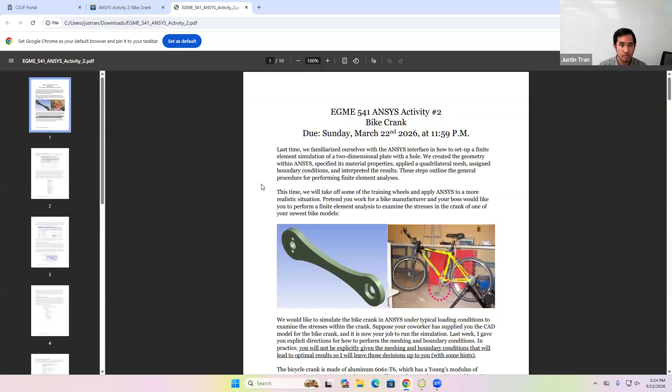And maybe you can print out on Saturday. Yeah, I probably have to pay for it first and then keep the receipt, and later on I'll reimburse you for it. No, we have to do that.

So yeah, we could leave around the afternoon of Saturday. I'll message you about the location and time.

Just ping me when you're ready for the poster and send it to me for one last review. Okay, yeah, I might need to change the words a little bit. Yeah, all right.

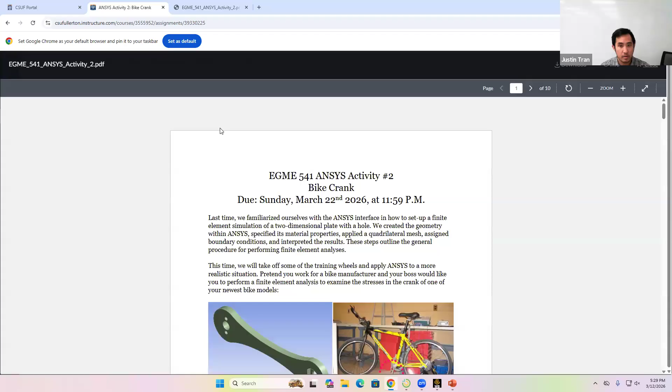All right, it's 5:30, so let's get started. Good evening, everyone. How's everyone doing today? Pretty good. Good, good. Everyone put Bengay on their hands after the midterm on Tuesday? Yeah, it was a long exam. I know, the first exam for this class is always pretty brutal.

So before we start today, since the midterm was very difficult, we're going to do kind of a break day. We're doing our second ANSYS activity today, the bike crank activity. This one's a little less time consuming, and actually a lot of people finish it pretty early, so hopefully it'll give you guys a bit of a break after the midterm.

But before we get started on the activity, I wanted to make a couple announcements regarding the midterm. So I haven't looked at them yet. I actually gave 3 midterm exams this week, so I need to grade my undergrads first.

So I think for you guys, I'll have the exams ready by next Thursday, March 19th. If you want to pick up your exam, I'll bring them to the lecture by next Thursday, and you can pick them up then. I expect the grades will be on Canvas by Wednesday night, the 18th. That's when I expect to be done.

Remember that there are 2 midterm exams in this class, and remember they have different weightings. One midterm is worth 35% of your grade, and the other is worth only 25% of your grade. And remember, the way I choose which midterm counts for higher or lower depends on which midterm you ultimately score higher on.

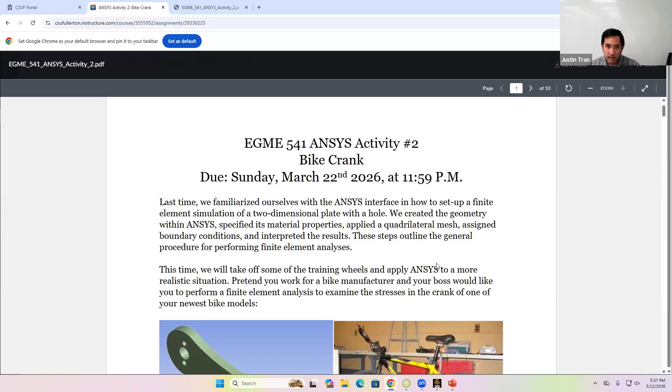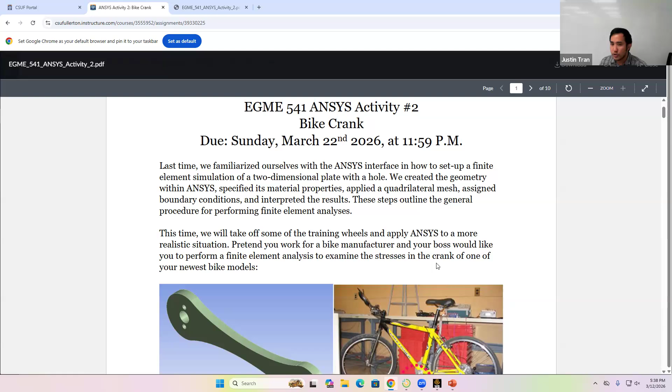And you're not really simulating a plate with a hole for no reason at all, right? So our second activity here, first of all, the geometry is a bit more realistic. And the application of how we use FEA is going to be a bit more realistic in terms of answering a specific question, because most of the time when you run FEA, you're never running it just for the sake of it.

So you're never just running it to create pretty pictures and diagrams, even though the diagrams do look nice. Usually you're answering some kind of engineering question, doing the analysis for some kind of purpose. And today we're doing an analysis of a bike crank, which is basically the part that connects the pedal to the rest of the bike frame. What we want to do is simulate this bike crank under a typical loading scenario, and determine whether the bike crank, as it's currently designed, is able to withstand these typical forces, and maybe find a way to redesign it a little bit better based on the results of our simulation.

For this case, I'm going to leave a lot of the finite element decisions up to you. Things like determining the mesh, determining the boundary conditions - I'll give you some hints, but for the most part I'll let you guys determine that yourselves. Also, for the first time, we are going to be making a custom material. We're going to make the bike crank out of aluminum 6061, which is a very common alloy of aluminum. And then we'll go from there.

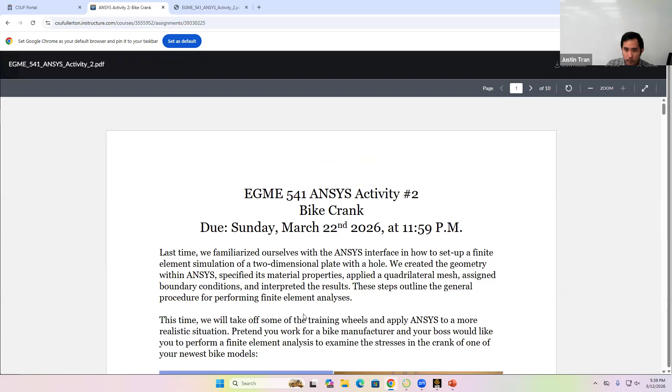So if you haven't done so already, let's go ahead and launch ANSYS. Remember, the way to launch it is, assuming it's installed on your computer, we need to launch the program called Workbench. So go ahead and search up ANSYS Workbench or just Workbench on your computer and hit enter. I'm going to talk for the next 5 minutes, but while I'm talking, you can launch it in the background since it takes a while to launch ANSYS sometimes.

Oh, and if you haven't done so already, the geometry for this activity is on the Canvas site. So if you go to our Canvas page, go to the activity page, go ahead and download the crank file for this activity as well.

One of the big differences you're going to see in this activity compared to the last one is that we're not going to draw our geometry from scratch. I'm actually going to give you the CAD file and you're going to load that within ANSYS itself. This is a bit more typical in terms of how ANSYS is usually used - a lot of times we're not creating CAD files from scratch within ANSYS. Usually you're creating the CAD file in another software like SolidWorks or AutoCAD, and then importing it into ANSYS to do the analysis. So this emulates that exactly - you're going to download the CAD file and then import it within ANSYS.

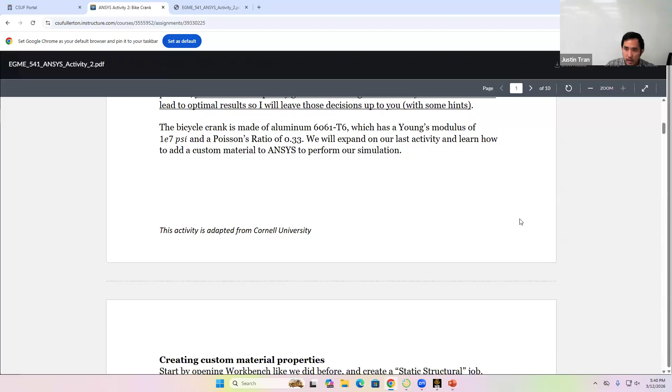All right, so that's kind of the goal for today. Compared to the last activity, I'm not going to be up here talking all too much, since the process is more or less going to be the same. We're basically going to be doing our geometry, doing our meshing, doing our boundary conditions, and doing the analysis from there. And one big thing you're going to see here is that I'm going to have you do a lot more with the results - I'm going to ask you things like analyze your results, predict things like the maximum force that it can withstand, and things like that.

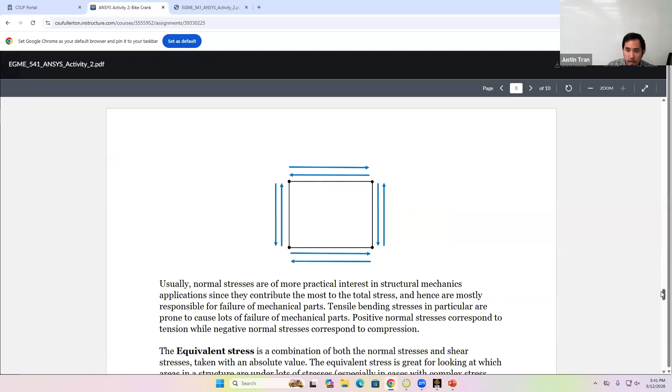So was everyone able to open up ANSYS and open up Workbench? Okay, let's go ahead and bring over Workbench here.

Oh, midterm one related question.

Considering no one really finished, would this first exam have a lower average that gets bumped at the end through grade scaling? Yes. That's the whole purpose of grade scaling: for a case like this, where the exam was pretty tough and the average was lower, that's probably going to lead to a higher amount of grade scaling at the end.

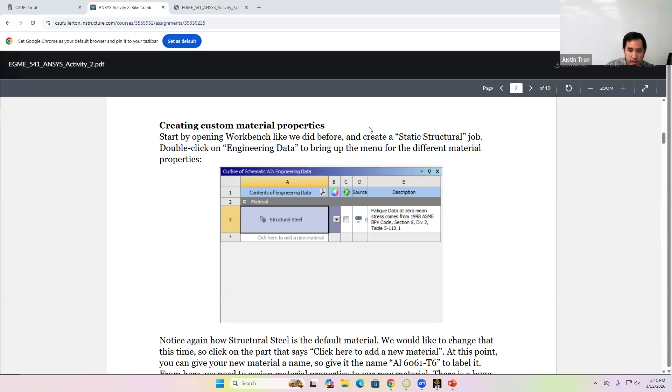But this does give you time to make it up on the second midterm, and on the final project as well. Overall, though, I think this will lead to more grade scaling at the end. I don't know how many points I'll add right now, since it's still pretty early in the semester. Generally in this class, the first midterm exam is the low point, and after this people tend to do much better on the second exam and on the final project. Last time I taught this class, I think I only applied maybe one or two points of grade scaling at the end, even though the midterm one average was probably around 65%. So there's a lot of time to make it up.

If someone has a crazy grade, would they get taken out of the scaling calculation? No — if they exceed 100%, they just get an A, since there's nothing past an A. But if you're asking whether I take them out of the average, no, I just take the average of everyone in the class.

The class is big enough that usually one outlier isn't going to ruin the calculations all too much. But I'll look at the data, and if there are a few outliers, I'll take that into account and think about it.

Okay, let's go ahead and open up ANSYS here. Let's open up Workbench, and just like last time, let's create a static structural analysis. So let's click and drag static structural and put it over here.

It's a little unfortunate that in this class we don't do too much ANSYS, since there are so many other analysis types to cover. There's obviously a lot more we can do with ANSYS, but for our purposes we're just going to do static structural.

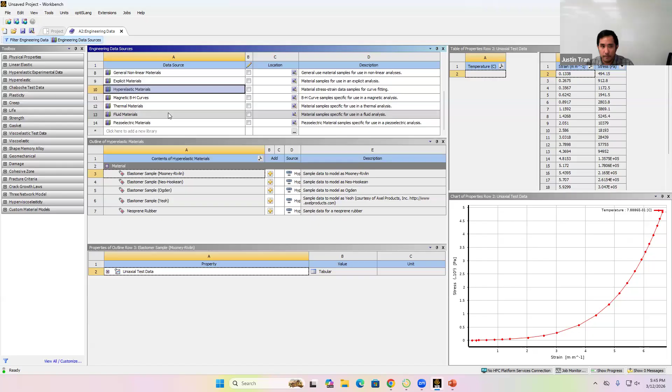You can see why a lot of these materials aren't loaded by default, since there's a lot to go through. Usually, if you're doing a basic static structural analysis, a lot of times you'll be adding materials from this library called general materials.

If you look here, there are different materials - here's our structural steel, there's even stainless steel, titanium, polyethylene, magnesium, cast iron. If you look at aluminum, if you left click on a material here, you can actually look and see its properties down at the bottom.

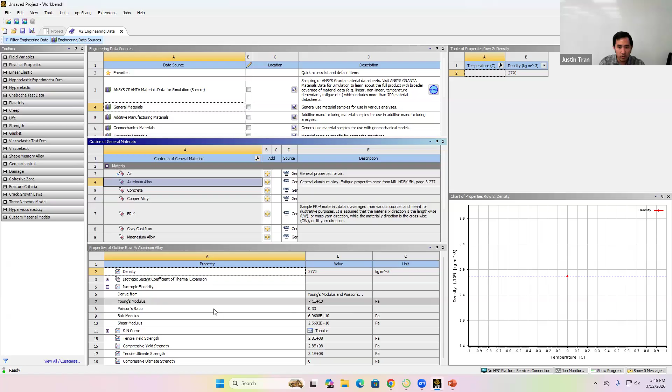Now let's check and make sure this aluminum alloy has material properties that match what we want for our analysis. We want our material to have a Young's modulus of 1 times 10 to the 7th and a Poisson's ratio of 0.33. If we come back to Workbench, we can see the Young's modulus of this aluminum alloy is 7.1 times 10 to the 10th Pascal.

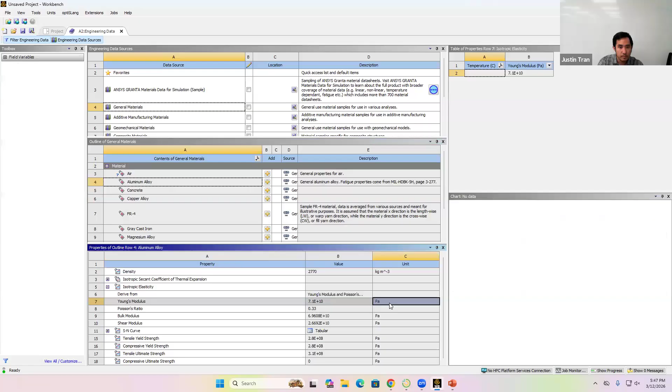So let's go ahead and change the units here somehow. Let's change the units to US customary, which gives us PSI. The units are up at the top here. That did not change it, let's see. I think they changed the interface here.

It used to be that you could kind of update the units and see them change. Oh, let's see, here we go. So if you want to change the view of the units, you have to change the units up here to whatever you want, and then click on this checkmark called Display Values in Project Units. I think that was an update they made on the most recent version.

If we look at our Young's modulus for our aluminum alloy, you can see it's very close. We're looking for a Young's modulus of 1 times 10 to the 7th PSI - that's how much we want for our project. ANSYS gives us a Young's modulus of about 1.03 times 10 to the 7th PSI, so it's about 3% off. This is pretty close, and it depends on how close you want to be.

But if that's close enough for you, you can just click on this plus arrow here to add that to your project. So to add a material to your project, you just click on the plus arrow and it adds it there.

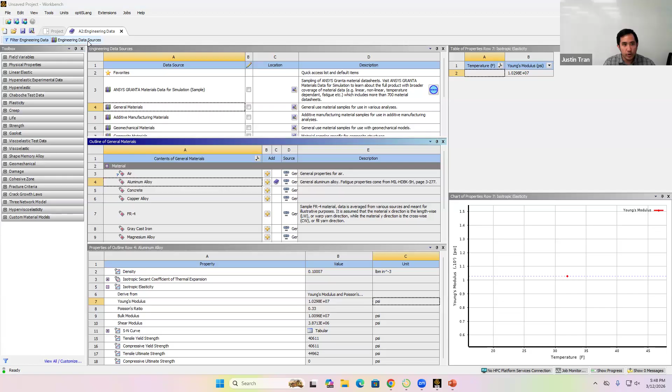To check and see if the material was added to your project, you can exit out of this library by left clicking on the book here, Engineering Data Sources, and come back to your library. Now we have 2 materials, one being aluminum alloy and the other being structural steel.

That's one way to add a material. If your material is already built in within ANSYS, that's generally the most convenient thing. But there's another way we can manually add materials that I want to show you. For now, was everyone able to add aluminum alloy to their project using that method?

Good. So the other way we can add a material is we click on this box here to add a new material, and we're basically going to add our material custom. Let's go ahead and click there and define our new material. Let me call this something unique - we'll call this AL6061. Now we're free to add in our material properties as we want.

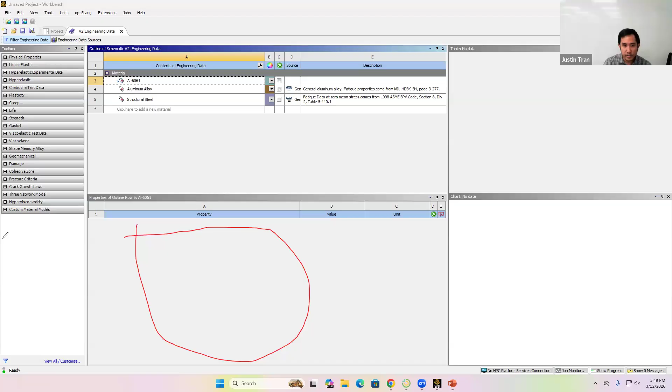Okay, so to add specific material properties, you can see right now it's completely blank. We need to define which material properties we want to add in, and there's lots of different material properties that we can do.

We can add in hyperelastic material properties, things like density, geomechanical properties, or viscoelastic properties. But for a general material here, where we're just doing a static analysis, the only materials that we need are linear elastic materials.

So in particular, we want to add isotropic elasticity of this material. So with your new aluminum highlighted here, go ahead and double click on isotropic elasticity. That way we can now define the Young's modulus and Poisson's ratio of our material.

For the Young's modulus, let's go ahead and enter the amount that we want, which is 1 times 10 to the 7th. You can just enter 1e7. And then our Poisson's ratio here is going to be 0.33. And so with that, our material here is fully defined.

So we've only defined the isotropic elasticity. But if you want to add things like density and viscoelastic properties, you can do that as well. But that's kind of the basics of making a material from scratch.

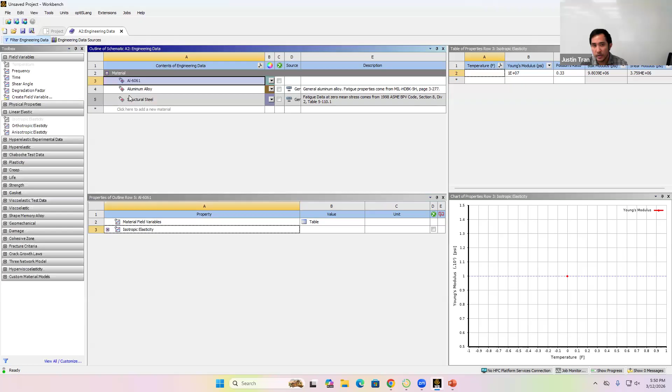So for this particular activity, you can use either one. You can use the pre-built aluminum, or you can use the one that you just defined here. But since this is our last ANSYS activity, I did want to show you both methods of adding a new material. Any questions on this?

Okay, good. All right, so let's go ahead and come back to the project. Let's close out of the engineering data. All right, so next thing we're going to do is add the geometry to the project. Remember, in this project, we're not going to draw the geometry, we're just going to simply import it from the file that we just downloaded.

So to import a geometry, you're just going to right-click on geometry here, and then go to this option for import geometry. Import geometry is going to allow you to basically browse, so let's go ahead and click on browse. Then we're going to add in the crank file that you just downloaded. Remember, the crank assembly is the file that's available for download from the Canvas site. So let's go ahead and add that in.

So if you're on the lab computers here, it's going to display as a SolidWorks object. But it's actually not a SolidWorks part, right? If you go to the file itself, I'm just going to show you really quick. I think it defaults to SolidWorks just because we teach SolidWorks in this class. But if you look at the properties, you can see that the file extension for this is actually x_t. So again, this computer thinks it's SolidWorks, but it's not.

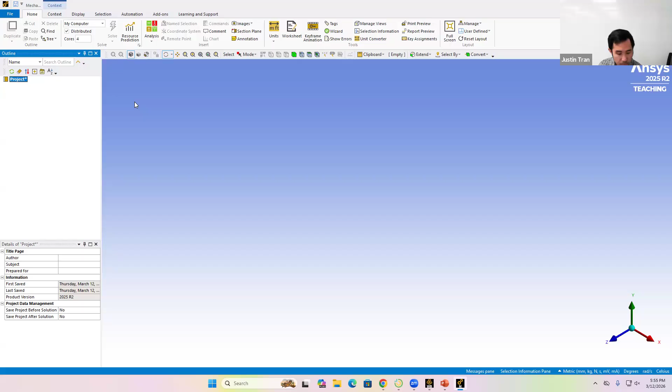Alright, so if all goes well and your import is good, after you open up ANSYS Mechanical, you should be able to see your part within the graphical user interface.

Everyone able to kind of get this part here? Everyone able to open up and see the bike crank? It probably takes a minute or two to open up ANSYS. It's not known for speed, that's for sure. Okay, everyone able to open up? Good, okay, alright.

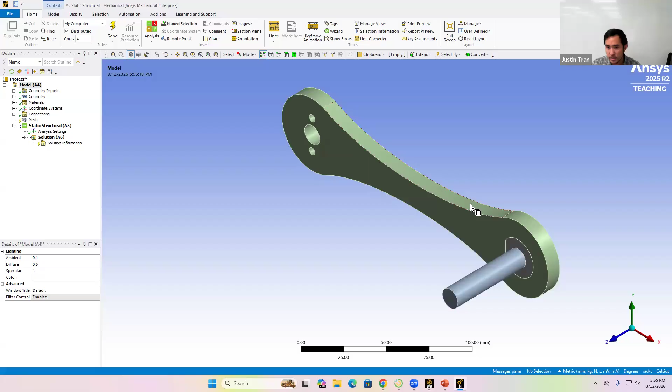So here is our bike crank, and what you can actually see here is actually an assembly of 3 different parts. We have the main body of the bike crank. We have the pedal, which is just the cylinder kind of jutting out here. And then we have an adapter ring that fits inside there so the pedal can mate with the bike crank.

For an assembly of parts like this, you can actually suppress different parts if you're not going to need them in the analysis. This is very common. Oftentimes in finite elements, you'll be given an assembly of parts that's way more complex than what you need, because a lot of times when engineers or designers make these CAD files, they're not making them to do analysis on - they're doing the CAD files to get every detail in terms of the manufacturing and things like that.

But one thing with finite elements and with any computational analysis in general is that usually when you add more details to your simulation, it actually makes it more difficult to run. A lot of times you add that difficulty kind of unnecessarily, and you just make things difficult for no reason. So a lot of times when you get these assemblies, you want to suppress some parts and remove them from the analysis just to give yourself an easier time.

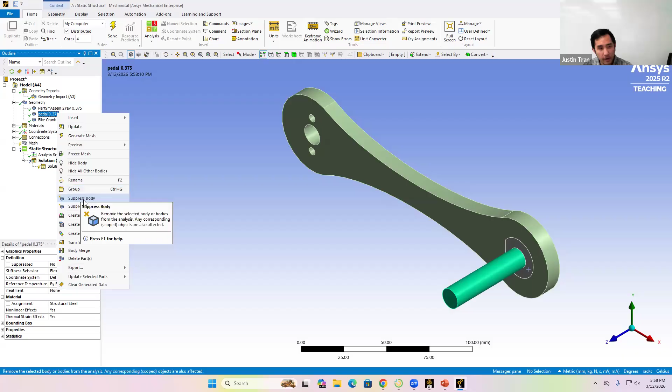First we'll suppress the pedal. Let's right click on pedal - you can find it by clicking this plus arrow next to geometry. To suppress a part, right click on the part, and then go down to this option called suppress body. Click that, and you can see that part of the geometry is no longer there. Now you can unsuppress it - it's not like you deleted it, you're just hiding it. To unsuppress it, you just right click it and then unsuppress, and then it's right back.

Let's do the same thing for this little adapter ring here, called part 9 assembly 2 rev X 0.375. So let's go ahead and suppress that one as well, so then all we're left with here is just the bike crank.

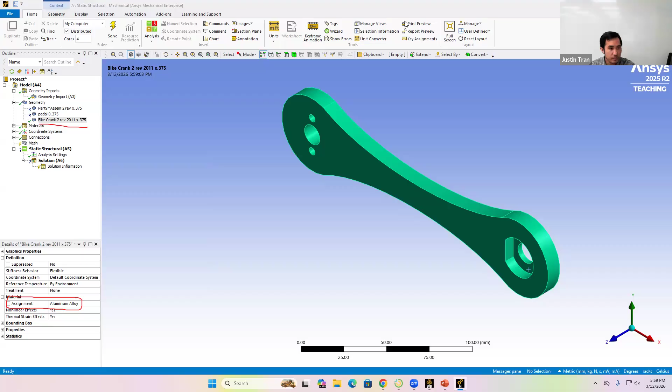Okay, good. All right, so now our geometry is ready, we have our material properties set, so now we can go ahead and move on to the mesh. So the mesh is actually fairly straightforward, so I think I'll do it together with you, and then I'll have you do the boundary conditions yourself.

So for the mesh here, we have a pretty straightforward part, and all we're going to do is assign a size. Remember, just like we did in the last activity, you're going to left click on mesh, and then in the bottom left-hand side of the screen, you're going to go to element size.

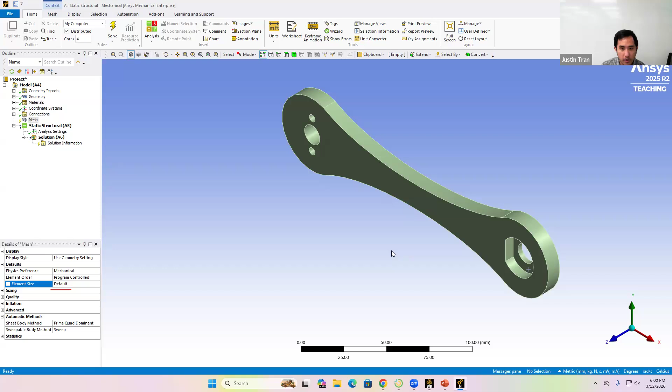Okay, so right now it's using the default size, but let's go ahead and specify something. Let's specify an element size - let's see how big this part is. I'm going to use this ruler down here to kind of estimate the size. There's a question in the chat.

Question: the materials don't seem to be loading when I click assignment. Do you not have any materials there at all, or do you just have structural steel? Oh, okay. Let me come back to you - let me get to a good stopping point, and I'll come back to help you.

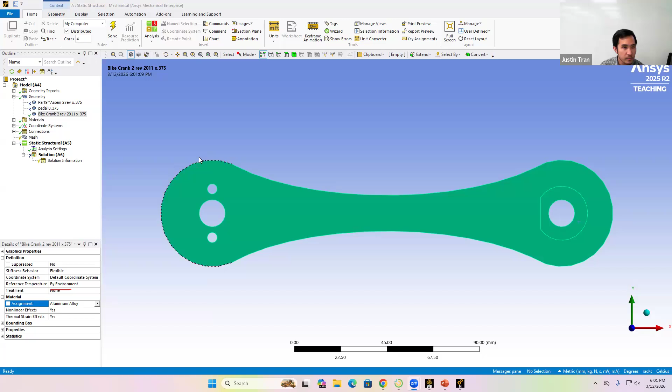All right, so for the mesh here, let's go ahead and set the size. We have basically a bike crank that's about maybe 200 millimeters long, so let's go ahead and set an element size of, let's try 25 millimeters to begin. Let's see how that looks. When you have your mesh, go ahead and right-click generate mesh. So with the mesh size of 25 millimeters, we get a mesh that looks like this.

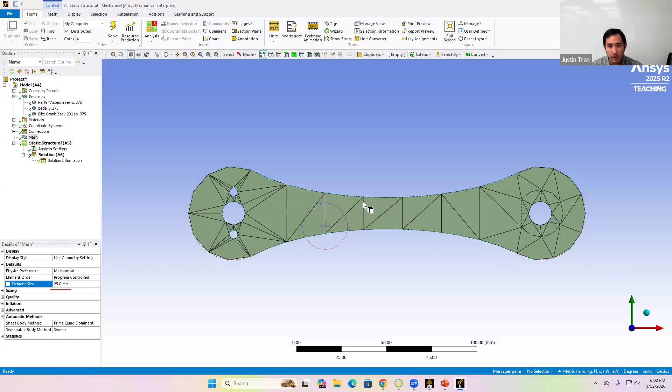This is pretty awful, not gonna lie - this is a pretty awful mesh just because it's very coarse. So let's go ahead and refine this mesh. Remember, our mesh here determines our accuracy, so the finer our mesh, the more accurate our results are going to be. So let's set our element size here to 5. Let's see what that looks like.

Okay, so with 5 millimeters, we're doing a little bit better here, right? But it's not really where I want it to be.

Let me give you one rule of thumb for meshing. Meshing is actually a very complex topic - you could spend weeks talking about meshing. There's a lot of opinions in terms of what's a good mesh, what's a bad mesh, and everyone has a hot take on that. But one good rule of thumb, especially if you have a relatively slender part like this, is you want to see how many elements are through the thickness of your geometry. One metric I always check for these types of simulations is I look at the thinnest dimension of your mesh. What you should see is that you should have more than one element through the thickness of the mesh - that means you should have more than one layer.

You should not have an element that stretches from one end to the other. Which is obviously what we have here. You can see this one triangle element that stretches from one edge to the rest. You don't want that, because then you have no interior nodes along this edge, which can lead to a lot of inaccuracies.

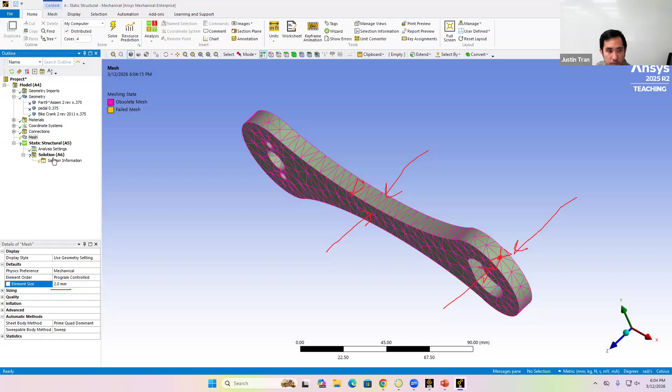Okay, with 2 millimeters here you can see we're doing much better. We have more elements through the thickness here, and this is going to give us a much higher quality result.

You can go even further down. Even with 2 millimeters we're kind of pushing it a little bit, but let's go down one more, to 1 millimeter, and see what that looks like.

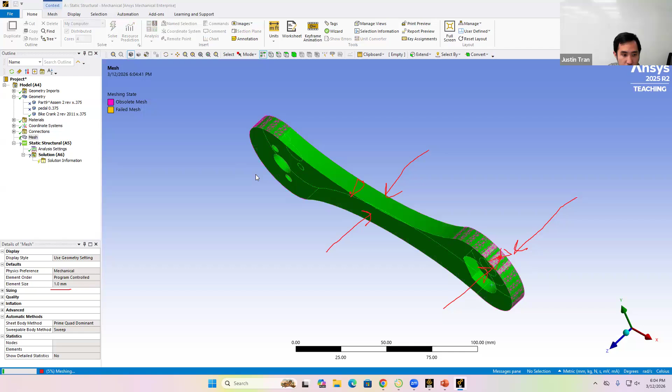With 1 millimeter, this is a little bit overkill. If you look at the statistics for this mesh, we're at 39,000 elements. For a tiny little bike crank like this, that's overkill, you don't need that many.

So let's just go back up to 2. I think 2 gives us a good balance here. It's pretty decent, and it gives us a decent mesh that's not too expensive, the number of elements is not too large, but it does at least give us 2 elements through the thickness, which is good.

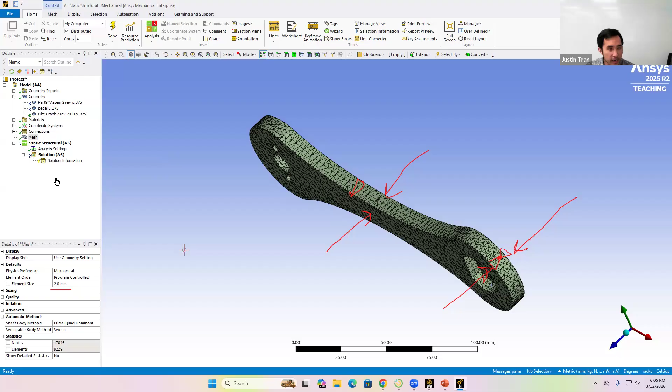All right, any questions on the mesh here?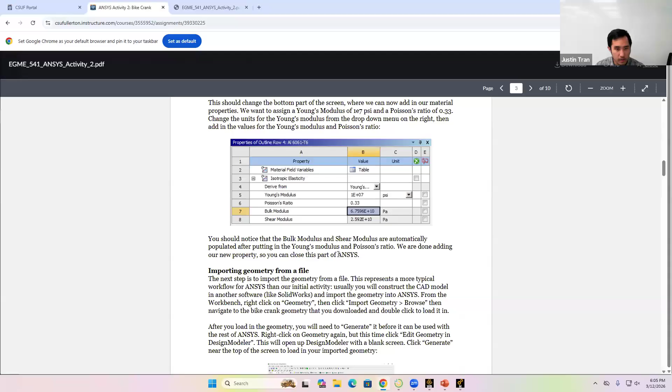Okay, so the next part, I'm going to have you guys work on your own while I go around and help debug people that are having issues. If you go to the project, to the activity document, we've done problem 1, the mesh. So that's done.

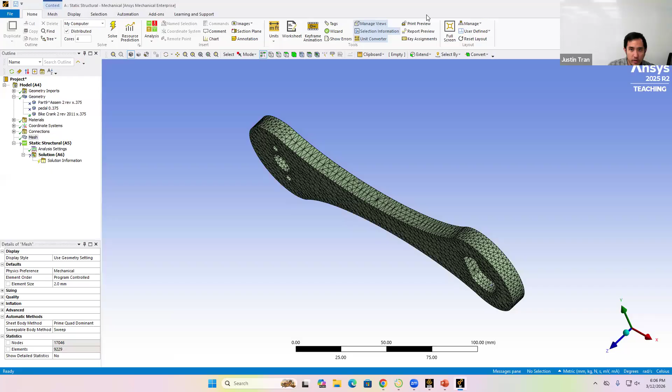Problem 2 is loads and constraints. You're going to be adding loads and constraints, forces and fixed supports as needed. I'll let you do this yourself, but the only requirement is that you must have at least 1 fixed support.

And you must have 1 location where a 100-pound force is added to the bike crank. You must add those 2 boundary conditions to your model. Where you apply them I'll leave up to you, but remember, you're modeling a realistic situation here.

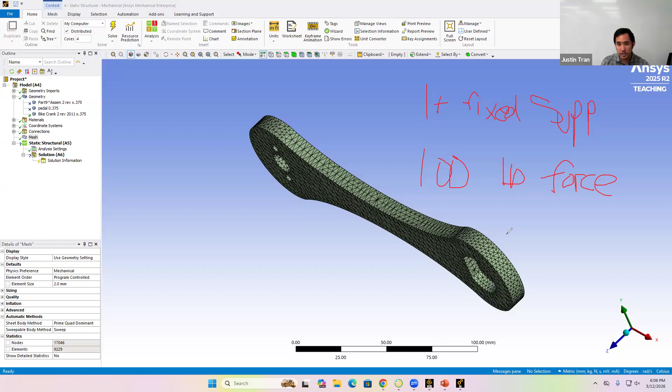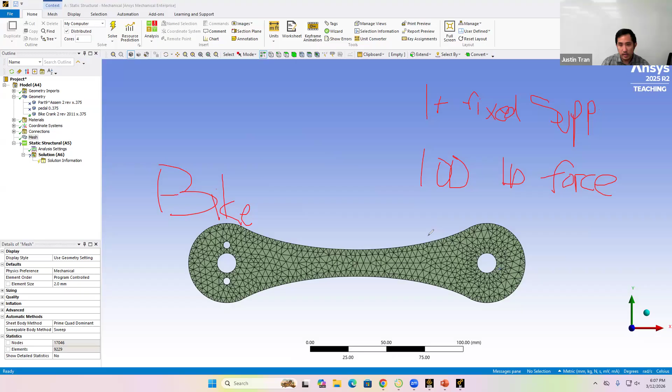Let me give you some additional context to help you choose where to put these. Here's our bike crank. You can expect that this side with the 3 holes is where the bike crank attaches to the bike, so the bike frame is on this side. The other side of the bike crank, remember, is where the pedal was. We suppressed the pedal, but that's where it was.

So this 100 pounds of force is meant to emulate the force of someone pushing down on the bike pedal. I'll leave that up to you, so not only do you have to determine the location of the force, but also which direction the force is going to go. You can do it in the Y direction, the X direction, or even the Z direction. Think about what makes the most sense in terms of the direction of the force.

Because remember, we want to simulate the worst possible case. So think about which direction of the force you want to apply, that's going to result in the biggest deformation and the biggest stresses within the bike crank itself.

There's no wrong answer here, and there is a correct answer, let me rephrase that. But I'll go over the correct answer in a bit. For now, I'll let you guys work on that yourselves while I go around and help people out with their simulations.

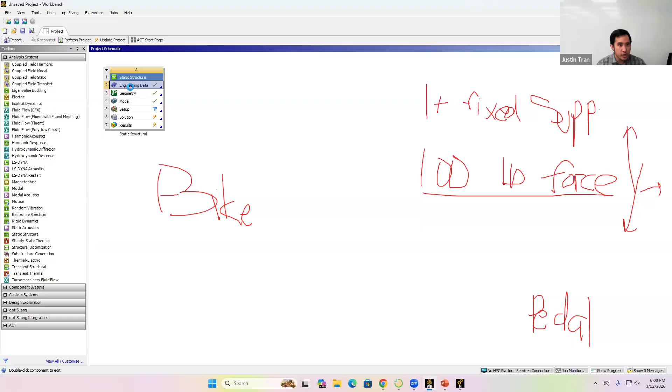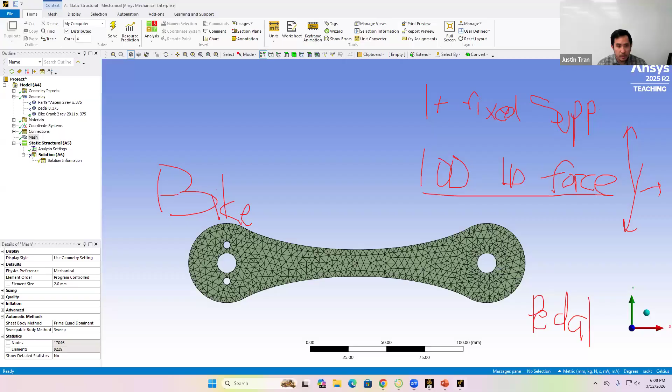Okay Marley, let me come back to you first. So you said you don't have any materials. When you go back to Workbench and click on engineering data, do you see the materials from Workbench? Okay, so under the materials tree, assignment. When you go to geometry here, you click on this and click on assignment, so when you click this the box is empty right here, that's what you're saying.

But when you go back to Workbench, all the materials are here in this table when you click on engineering data. Oh, that is very strange, every year it's always a new issue with ANSYS here. Might be a bug, kind of a concerning bug, just because it's a pretty core feature.

Yeah, that's always going to be a good thing to check. So when you click under the materials tab here, do those materials show up when you click this plus arrow next to materials? Oh interesting, they show up, but you can't assign them. Interesting, huh.

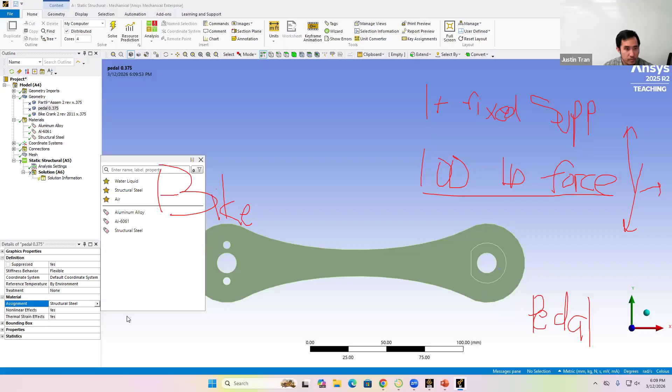That's very strange, can you show me? Can you share your screen, if that's possible? Let me give you privileges to share screen. Okay let me look at this, I'll just look at your screenshot, you don't need to share your screen. Oh okay, oh it's just a complete blank box. That almost kind of seems like it's trying to load, but it's not loading for some reason. I wonder if it's an issue with RAM or something like that.

Okay, I would say for now, if you can create a mesh and do the boundary conditions, let's just do it in structural steel for now, and then maybe later we can try to change the materials again. I think there are different ways to change the materials, but you may have to do it in a different way. For now, just doing it in structural steel is fine. So Marley, go ahead and create the mesh, then create the boundary conditions, and we can go from there.

Okay, I'm gonna make my rounds here. Okay, so I have the opposite problem of Marley, okay, where my materials are not good.

Oh okay, so it's in the workbench? Yes, but here's the catch, so for whatever reason it wouldn't open. Okay, so what I did is I opened Workbench myself, and then I put import geometry just to get it started. And I was assuming that Workbench and Mechanical would connect the two dots, but I don't think it did.

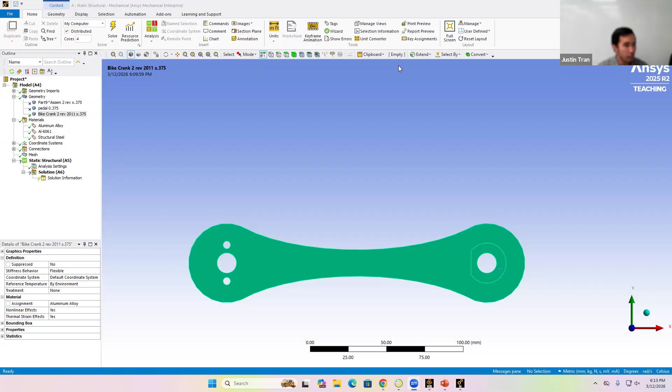Let me go ahead and add my own boundary conditions here. Oh, gotcha.

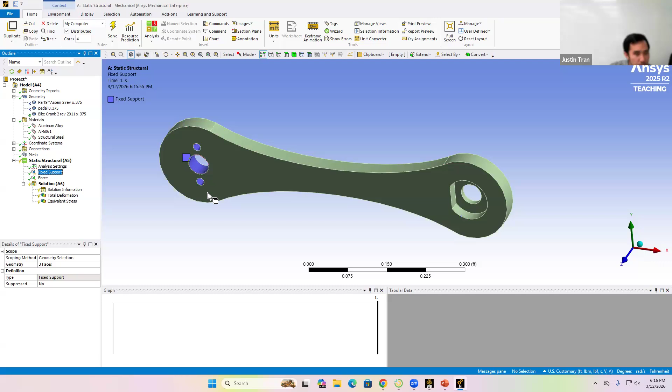So you're going to have situations where your part's actually fixed to the ground or bolted to the wall, and those are pretty obvious where you're going to apply a fixed support. But in this case, this bike crank is going to be attached to a larger bike frame, and relative to the bike frame, this bike crank is going to be pretty stationary. So that attachment point, we can treat as a fixed support.

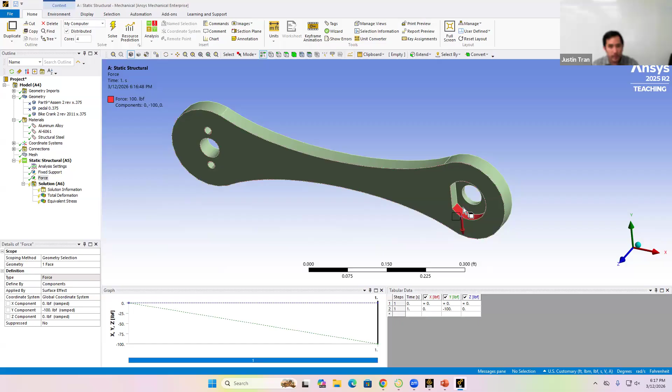For the other boundary condition, we're applying a force boundary condition, and I'm applying it at the location where the pedal is. I've applied my 100-pound force in the negative Y direction. The reason I'm doing that is because I'm looking at a situation where the bike crank is horizontal like this, and basically the person is stepping down on the pedal, applying a downward force. So we have 100 pounds of force being applied downwards.

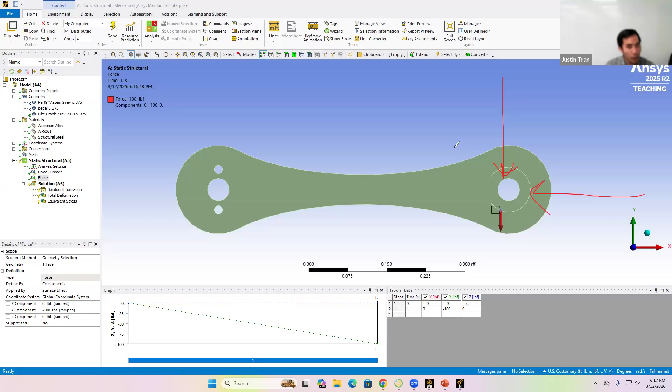Now, another option that I've seen people do in the past is they've applied a compressive force, so a force in the negative X direction. That's also valid, it'll also create stress in the part. But if you're talking about the direction of force which is going to cause the most deformation and the most stress, bending is always going to produce more stress than compression.

So if you ever have a beam-like structure like this, and you want to find the direction of force that's going to cause the most damage, you always pick the bending direction. By applying the force in this direction, it's going to cause the bike crank to bend down this way, and then you're going to have bending stresses - tensile stresses up top, compressive stresses on the bottom - and that's going to be much greater magnitude than just a pure compressive force.

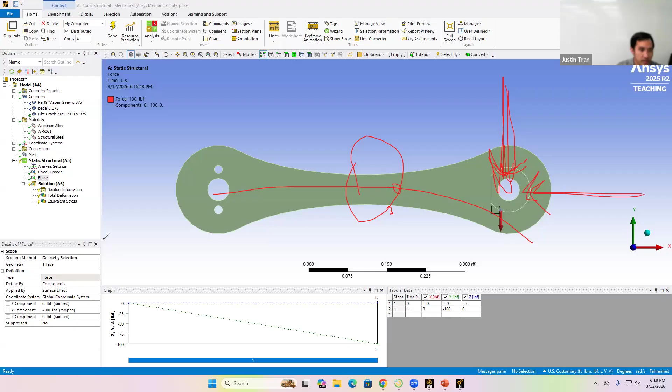I've also seen people apply the force in the Z direction when I've run this activity in the past. Technically, yeah, that's also a bending direction, so that'll put the bike crank in bending, but that's not exactly realistic because no one is pushing their bike crank from the side like that.

So when you're doing these finite element analyses, you want to put the boundary conditions in usually the worst possible case, just because a lot of times you're doing failure analysis. But you also want to be realistic too, so you don't want to put things in a weird spot that's not going to be realistic.

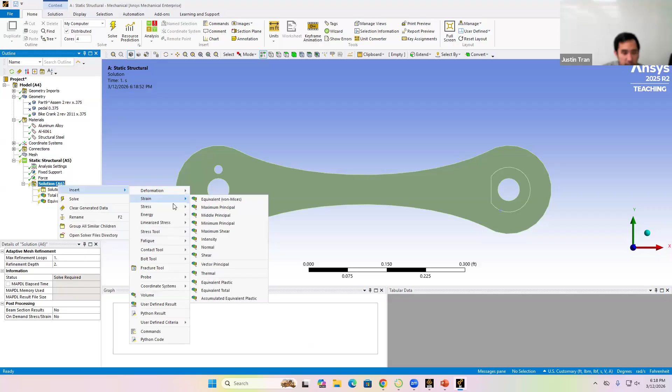Okay, so now that we have our mesh, now that we have our boundary conditions, we are ready to solve. So to create a solution, you're going to right click on Solution A6. That's going to insert our total deformation, let's go ahead and insert our equivalent stress, and let's go ahead and run it.

Wait, for some reason it's taking a long time.

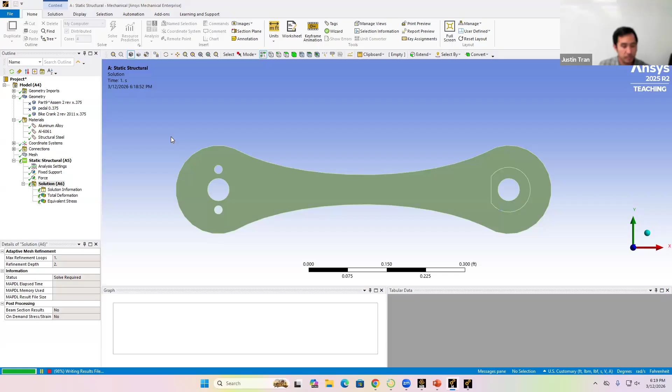So that makes sense, right, because that's where our force is being applied. And we have our fixed support here on the left, so it makes sense that the deformation is maximum on the right.

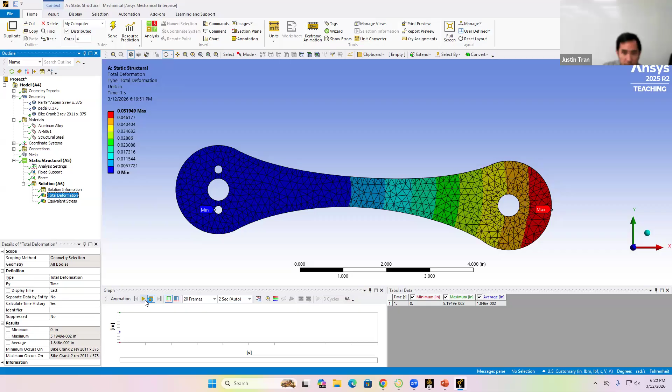In fact, you can play a little animation of the bike crank deforming. The animation doesn't do anything, it's just for fun. But you can do that if you want.

Another thing you can display here is your equivalent stress. The stress is going to be important because ultimately we're going to run a failure analysis on this bike crank. So from the stress analysis here, you can see the locations where the stress is maximum. The stress is maximum at the top and at the bottom. It's a little bit hard to tell from the equivalent stress because equivalent stress is kind of like stress in magnitude. But at the top here, we have basically a tensile stress,

And on the bottom here, we have a compressive stress, as we typically expect in bending.

The other thing to see here is that the maximum stress magnitude, yours is going to be a little bit different. So if you don't get this exact number, don't fret, especially if you use a different material property. Remember, I'm using the built-in aluminum alloy that ANSYS has, but my stress magnitude here is 13,712 psi.

All right, and so that's the activity. So last thing you're going to do here is basically this question: we've done everything up until this point, so next I want you to compute the maximum load that this bike crank can sustain before being in danger of failing.

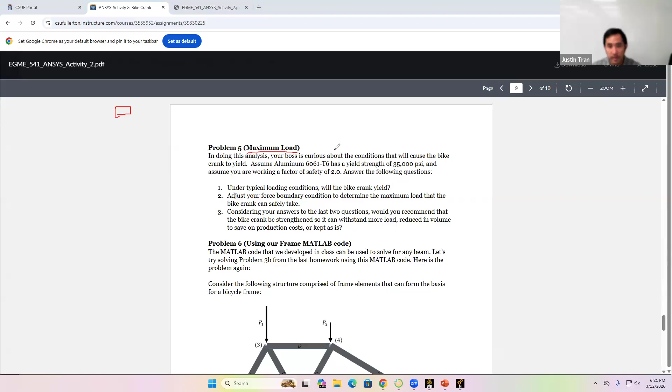For this part, we're going to assume that our aluminum has a yield strength of 35,000 psi. What that basically means is that the stress in our bike crank can get all the way up to 35,000 before the bike crank will fail.

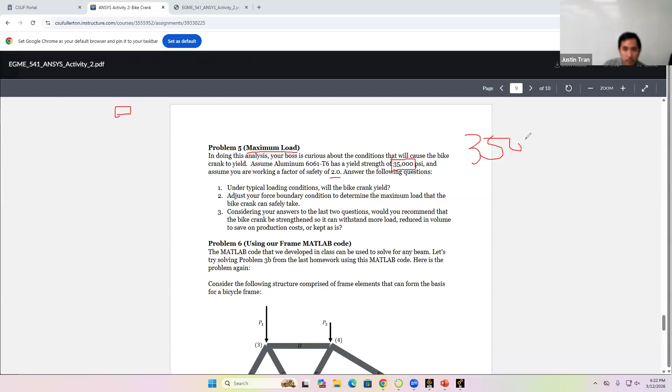And we're going to work with a factor of safety of 2. The way we're going to use factor of safety here is that we take our maximum yield strength and divide it by the factor of safety. So we're going to take 35,000 and divide by a factor of safety of 2, and that's going to give us a maximum stress of 17,500 psi.

So under these design constraints, we can say that our bike crank can sustain up to 17,500 psi. The first question we're going to ask is: is our bike crank safe? Since 13,712 is less than 17,500, we can say that yes, for a 100-pound force, our bike crank can sustain that, and it'll be safe even with our fairly aggressive factor of safety.

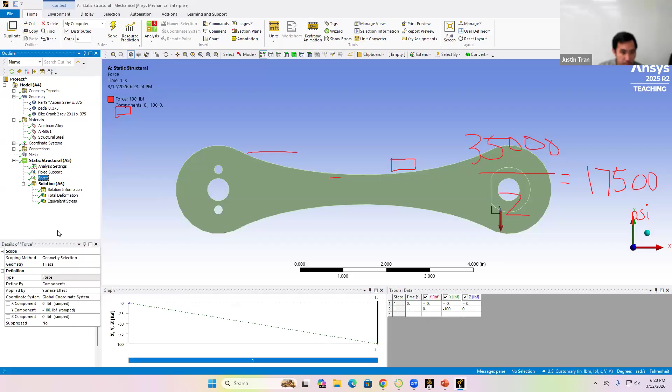And so for this part, I want you to find out what the maximum load is that the bike crank can take before it yields. Go into your force boundary condition, make sure that you're in bending, so make sure your force is in the y direction. I want you to change this force and increase it until you reach a point where the stress is about 17,500.

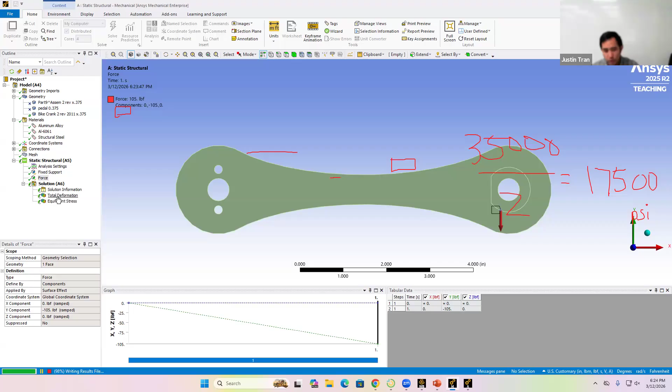So instead of minus 100 here, let's go ahead and increase it. Let's make this 105. I increased the load from 100 to 105, and we can go ahead and run our simulation one more time. Then wait a couple minutes for whatever reason, even though this is a simple case. You may want to coarsen your mesh if it's taking a while. After increasing my load to 105, now my stress is 14,397, which increased.

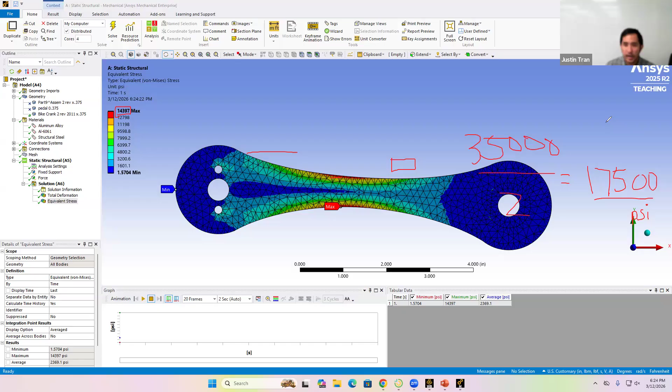So I basically want you to keep increasing the force and find the amount of force that the bike crank can take before we reach the stress of 17,500. By the way, don't waste your time trying to get exactly 17,500 — it's very hard to hit this on the nose. As long as you're within maybe 17,600 or 17,400, that range is close enough.

So don't waste an hour changing the force by 0.1 pounds until you reach 17,500 exactly. As long as you're in the right ballpark, within 100 psi I'd say that's close enough.

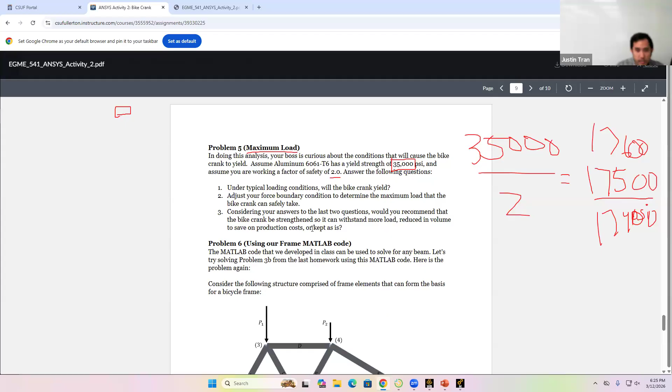But that's not the only part of this activity. If you remember, a couple weeks ago we developed our MATLAB code to solve frame problems. One part of this activity is I want you to use that code to solve this frame, which is from the homework.

So remember, don't solve this by hand. You want to input this in MATLAB to solve it. And then the last part of this activity, probably the part that'll take up the most time, is...

I want you to implement a 2D truss code. We talked about this a couple weeks ago, but I want you to take the methods and methodology we used for the frame code and write another code that implements the solution to a 2D truss. I walk you through the different steps in steps A through F.

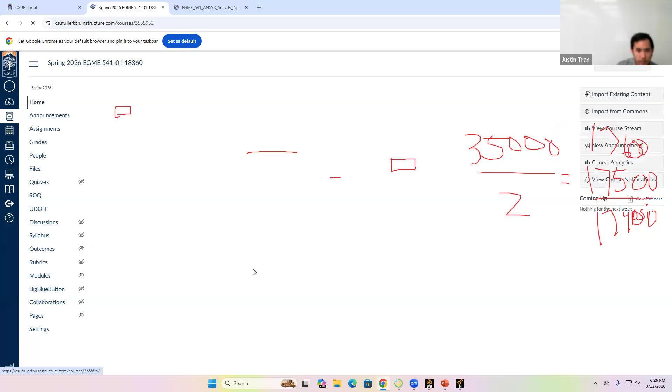Did I post the frame solution code? Let me see, I don't think I posted it just yet. I'm going to do that when I get back to the office, so I'll post a solution for the frame code. You can use that to solve problem 6 on the activity, and then use it as a template or guide to implement the last part of the homework.

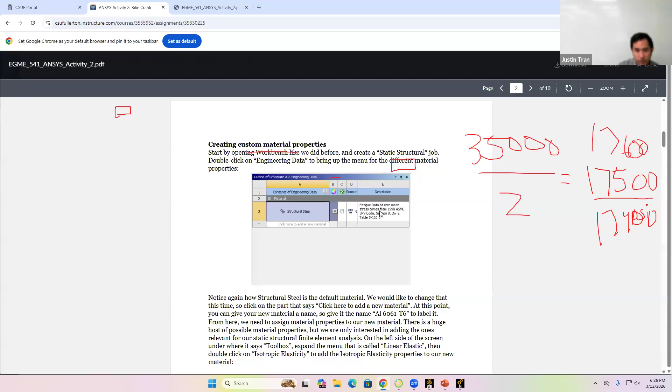So this activity has two parts: the ANSYS part and the MATLAB part. You have the rest of class to work on it, and until next Sunday to complete everything. Any final questions before I let you guys start working?

For the last 20 minutes of class today I'll keep making my rounds, so if you're still having issues with ANSYS or have questions on the MATLAB, go ahead and ask. But that's it for me, I don't have any more content planned for today, so you guys can take off if you want.